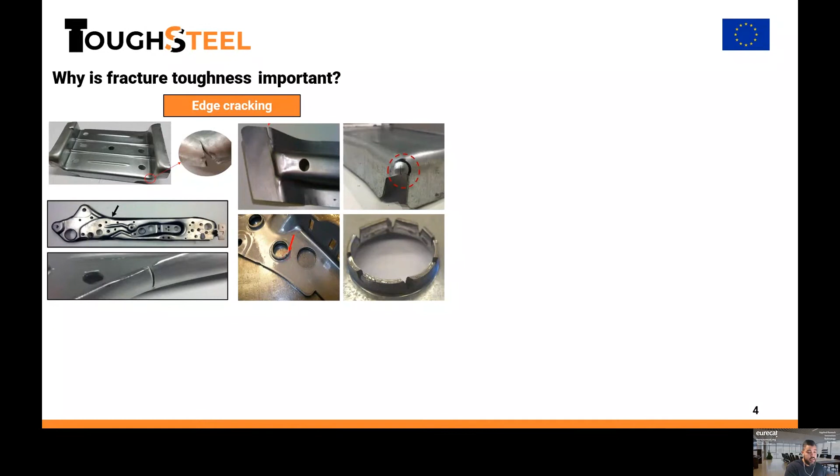With these materials, problems related to cracking resistance and limited ductility are more and more frequent. These include problems like edge cracking during cold forming in damaged, punched, or trimmed edges, or the formation of cracks during impact loading where the material is subjected to severe plastic deformation. These fractures, related to crack initiation and propagation resistance and to the damage tolerance of the material, should be addressed through the material property that governs this behavior, which is the fracture toughness.

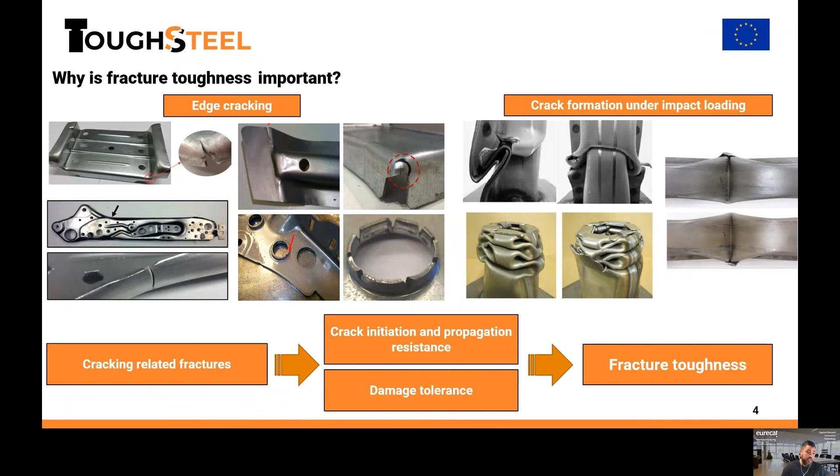We have seen over the years in different research works that fracture toughness is indeed a good, suitable material property to define the fracture behavior of high-strength metal sheets. Now, the key question is how to properly measure fracture toughness.

The first important message we want to make is that fracture toughness cannot be estimated from tensile properties. It is often assumed that steels or materials in general with greater elongation, or greater area under the stress-strain curve, or the greater UTS by total elongation product, which is usually also used as a toughness indicator, are related to the fracture toughness of the material. But this is not true.

We will see this later also. The important message is that we have to forget about this concept, or this approach, of trying to estimate fracture toughness properties from tensile properties.

The correct framework to evaluate fracture toughness, understood as the crack propagation resistance, or the resistance of the material to propagate an existing defect, should be measured in the frame of fracture mechanics. In particular, since we are talking about materials with high ductility or ductile metals, we should consider elastic plastic fracture mechanics.

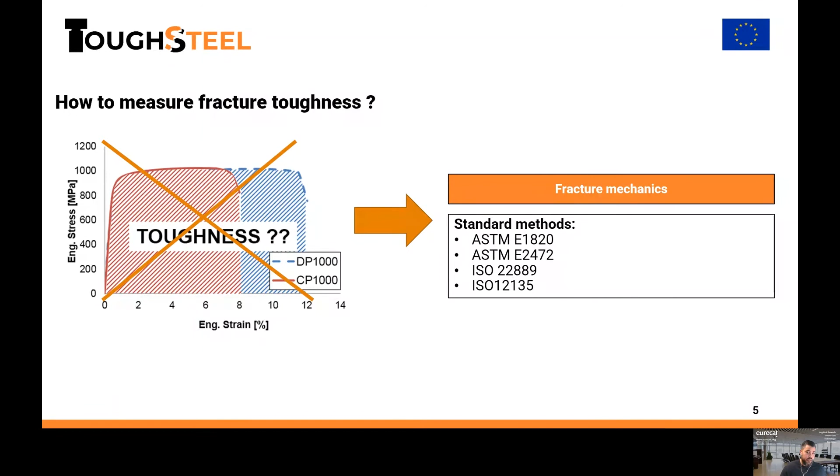There are different standard methods to evaluate fracture toughness in the frame of elastic plastic fracture mechanics. Some of the most popular ones are ASTM E1820, ASTM E2472, or the equivalent ISO standards 22889 or ISO 12135. These standards define different methods and procedures to evaluate fracture toughness in terms of different parameters like the J integral, the crack tip opening displacement, or the crack tip opening angle, and so on.

Now we'll take a look at some of these different methods and what are the advantages and limitations when using these techniques on thin metal sheets.

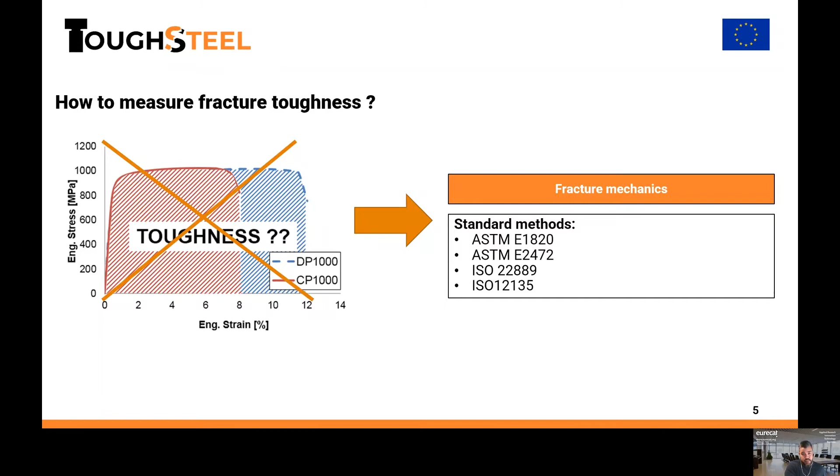First, let's see the J integral. Let's talk a little bit about this J integral procedure. Maybe it's the most known or the most well-established procedure to evaluate the fracture toughness of ductile metals. You can measure the J integral following the procedure described in ASTM E1820.

This standard describes two procedures: one basic procedure to evaluate a single initiation toughness value, J1C, or a resistance curve procedure to evaluate this J resistance curve, like in the image here, where the J values are plotted as a function of crack extension.

These J1C values, or the single initiation toughness value, are known to be very conservative when the material has a significant contribution from stable crack extension. So in this case, the full J resistance curve should be provided.

An important consideration here is that this standard procedure is intended to evaluate the plane strain fracture toughness of metallic sheets. So the thickness requirements described in this standard cannot be satisfied by thin sheets like the ones under consideration, which range from 1 to 3 millimeters in most cases in the automotive sector.

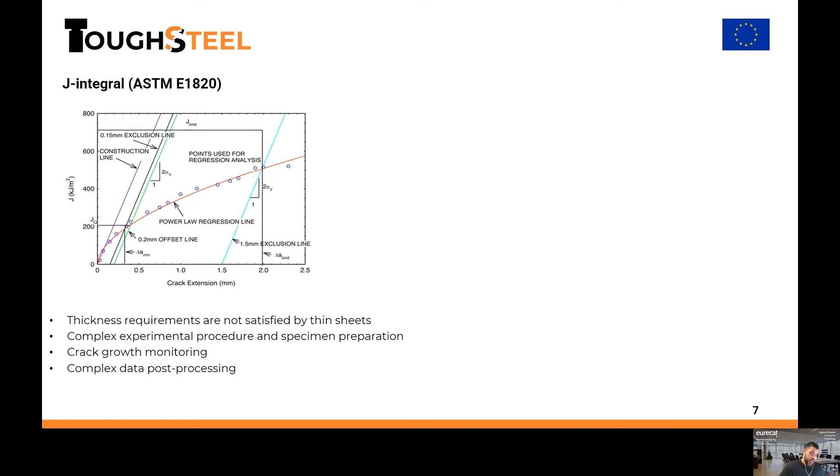Remember that one limitation of these testing methods is the thickness requirement. The specimen geometries described in the standard procedure can't really be applied to thin sheets, because usually the specimen geometries are based on a proportion with respect to thickness—we're talking about 2 to 4 times the thickness. Since we're talking about thicknesses of 1 or 1.5 millimeters, this makes the specimen size impractical for testing.

But if you use alternative specimen geometries, not following these standard recommendations, you can also evaluate these J-resistance curves. For example, you can construct a compact tension specimen with proportions following alternative standards like ASTM E561, which is less restrictive concerning thickness dependence on specimen geometry—it makes no mention of the proportion being based on thickness. So you can use this kind of specimen.

Alternatively, there are double-edge notch tension specimens, which are rectangular specimens with two symmetrical cracks. Using these alternative specimen geometries, you can use similar or equivalent procedures to evaluate J-resistance curves in thin metal sheets.

Here's an example of the J-resistance curve obtained for this kind of specimen. This curve is slightly different from the one described in the ASTM, because here we identify two different parameters: Ji, defined as the J integral at crack initiation—understood as the point where the first small crack advance is detected by a video camera located next to the surface of the specimen—and the JC value.

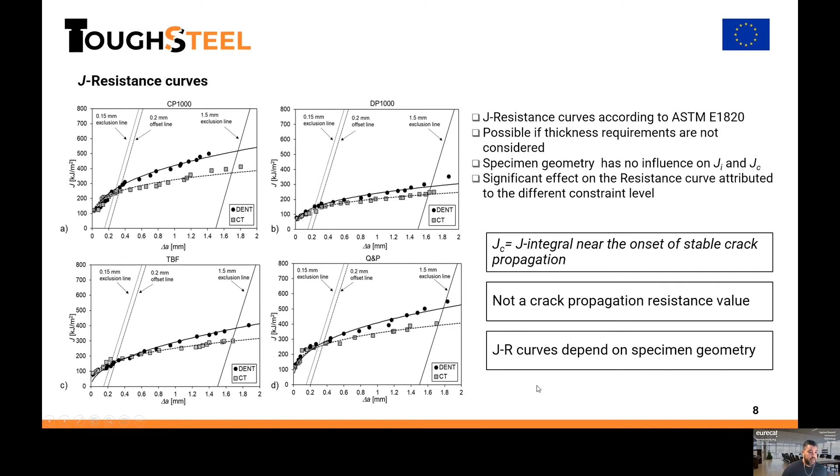Also it's important to keep in mind that these J resistance curves depend on specimen geometry, so this is not a property of the material.

Now let's take a look at another interesting alternative method, which is the essential work of fracture. The essential work of fracture, as I said, is a very interesting method. It was developed by the end of the 70s as an alternative method to evaluate the plane stress fracture toughness of thin metal sheets. And the method is based on a simple idea.

As I said, this fracture energy during a ductile fracture process can be split into two terms: one, the essential work of fracture, which is developed in the fracture process zone, the fracture toughness itself, the energy to generate new surfaces at the crack tip; and also an extrinsic, or non-essential, plastic work. Remember that in the J resistance curve, all the points have an extrinsic contribution from the plastic work. So this is the same idea.

This specific essential work of fracture, which is developed in the fracture process zone, depends on the cross section. It occurs in the crack plane, while this outer plastic work depends on the volume — this plastic work surrounding the fracture process zone depends on the volume.

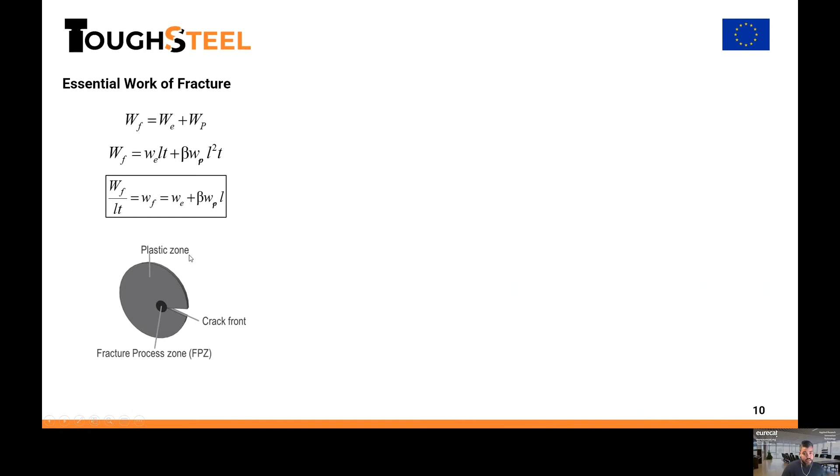This is a simple and very clever way to separate both the essential work of fracture and the plastic work. If we test a series of specimens with similar geometry but different ligament lengths — the ligament length being this uncracked area, or the distance between two notches. In this case, this is a double edge notch tension specimen, which is the recommended specimen for thin metal sheets.

But of course, in principle, any kind of fracture mechanics specimen can be used. In the case of thin sheets, it's recommended to use these DENT specimens because the stress during the full test is tensile and there's no problem of buckling and so on. So this is the most recommended one.

In summary, we test these specimens with different ligament lengths, and by plotting the load versus displacement curve and integrating the area under this curve, we obtain the total work of fracture. As we can see here, as the ligament length increases, the total work of fracture increases — the energy for fracture is larger.

Then, dividing this work of fracture by the cross section, we convert it to a specific work of fracture value, and we plot it as a function of the initial ligament length. We obtain a plot like this, and then we can separate both the essential work of fracture and the plastic work by making a linear regression: the intercept gives the specific essential work of fracture, and the slope indicates the plastic work.

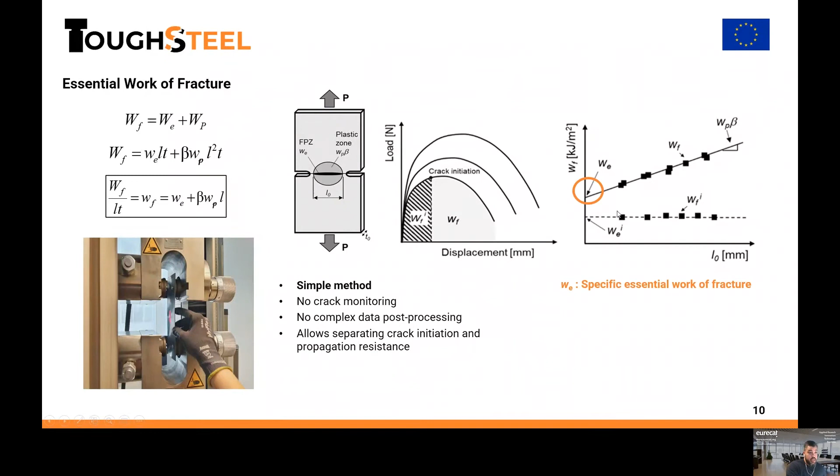The main result, the fracture toughness value we obtain here, is this specific essential work of fracture, which represents an average crack propagation resistance, since it's obtained from a series of energies for complete fracture. So it contains contributions from both crack initiation and propagation resistance. Although in the literature it is often said that this specific essential work of fracture is equivalent to the JC value obtained from the J integral procedure, we'll see later that this is not necessarily true.

Also regarding notation, as you have seen, we use JC to avoid confusion with J1C, which is often used to refer to the plane strain fracture toughness. Since we are in plane stress, we use JC instead of J1C.

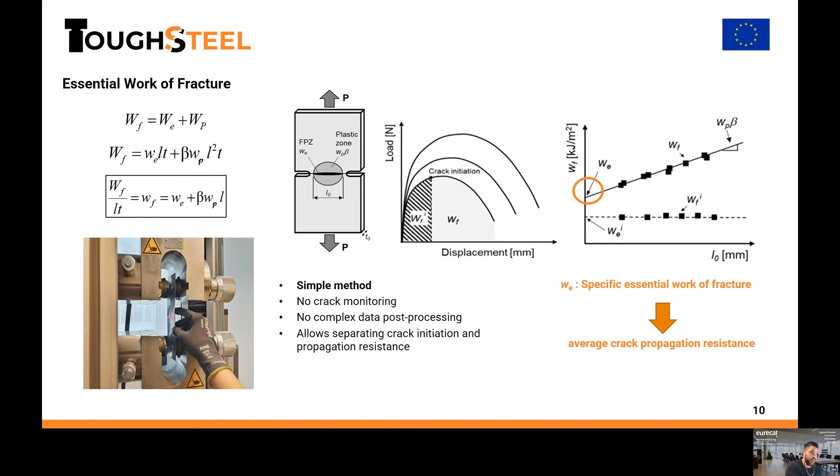There is a testing protocol developed by the European Structural Integrity Society, the ESIS group, but it was actually developed to measure fracture toughness of polymer films, not metals. There are no recommendations regarding specimen preparation and so on for metallic materials. In this sense, we have been working in a recently finished European project called FormPlanet on the development of a CEN workshop agreement, which is like the first step towards standardization of the method, working with relevant companies of the sheet metal industry and standardization institutions like UNE and DIN.

We have developed this method where we describe the methodology, recommendations about specimen geometries, specimen preparation, and so on. We hope this is a first step to standardize the method and foster its implementation in the sheet metal industry.

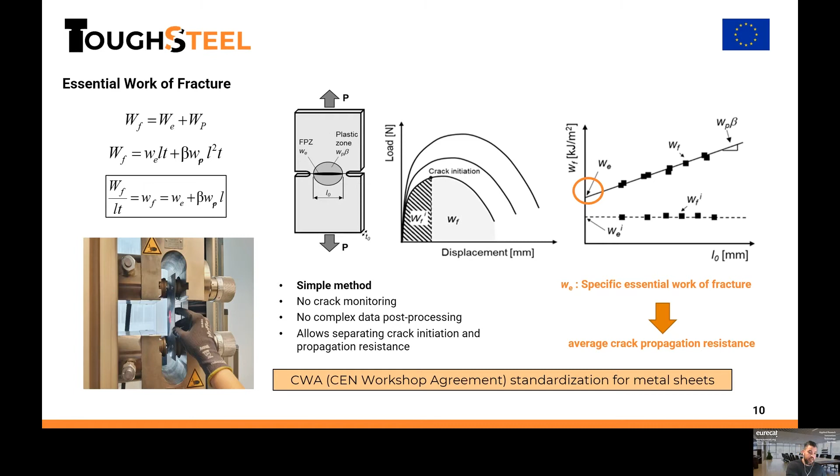As we can see, this is a very useful tool to define the different fracture behavior of different materials, and we have validated this. The method has been used a lot over the years, mostly in polymer films and also in other ductile metal sheets like aluminum alloys and ductile steels, but we have been working a lot with application to advanced high strength steels to understand this different fracture behavior.

As I said, this is an interesting part of the essential work of fracture: it allows separating the contribution of initiation and propagation, with the essential work of fracture related to propagation, but also allowing us to obtain this initiation toughness.

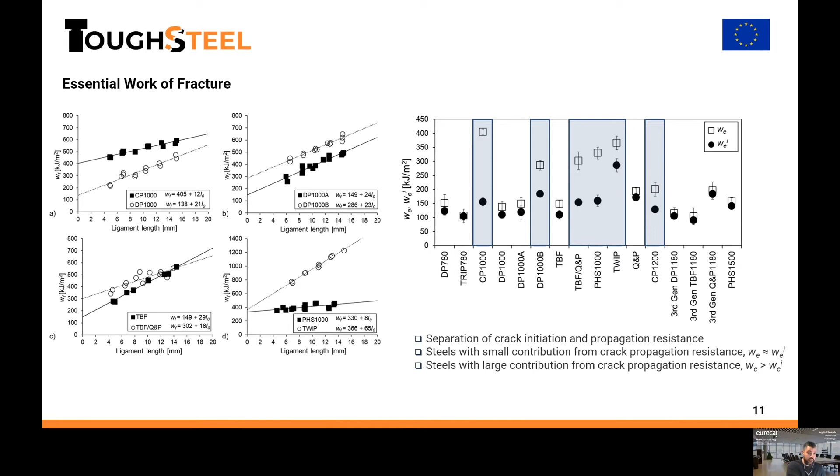Finally, let's talk a little bit about another interesting method that has gained increasing interest over the last years. It has been used especially to characterize the tear testing of aluminum alloys. This is the Kahn-type tear test.

This test was developed to evaluate the notch resistance of aluminum alloys. The procedure is described in ASTM B871, although this standard was withdrawn in 2017. But it could still be applied to evaluate the notch resistance, or relative toughness, of the material. The test consists of pulling this Kahn-type specimen, which is a single edge notch tension specimen. The standard recommends the use of a really sharp notch, and doesn't recommend fatigue cracks, but if you want more accurate values, you can also nucleate the fatigue crack in the notch.

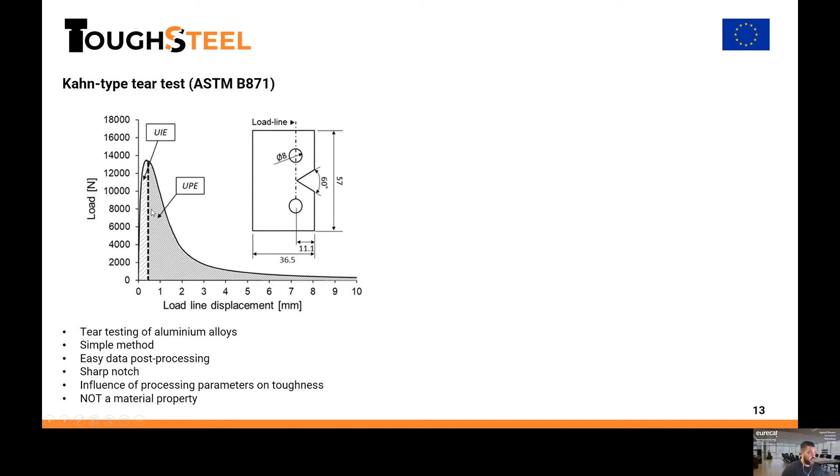Then you pull this test up to fracture, and you obtain this characteristic load versus displacement curve. By integration of the area, you can obtain two parameters: the unit initiation energy, which represents the area up to the peak load and is related to the notch resistance to nucleate a crack; and the unit propagation energy, which is the area under the curve after the peak load until final fracture, representing the crack propagation resistance of the material.

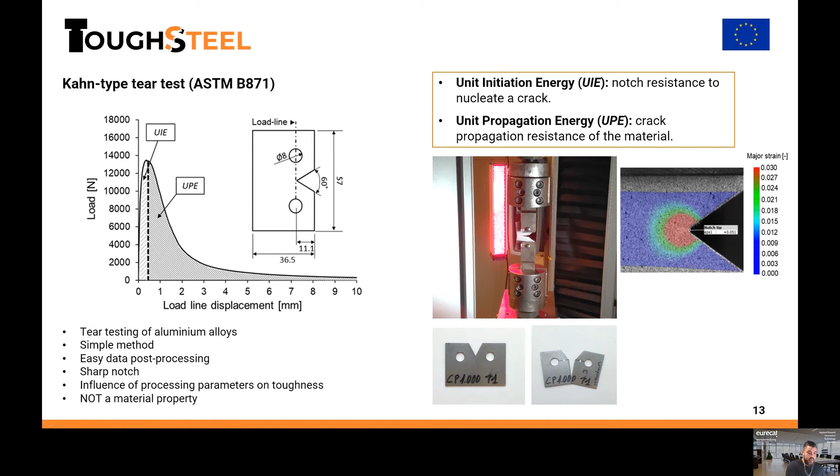This is a very simple method, and it has been very interesting for fast screening of materials. However, it's important to consider that it's not a material property. As the standard suggests, it must not be considered a fracture toughness value itself, but rather a toughness index. The geometry and test setup are quite simple, and it can be combined with digital image correlation to obtain different parameters. However, we must be careful when considering results from different testing methodologies.

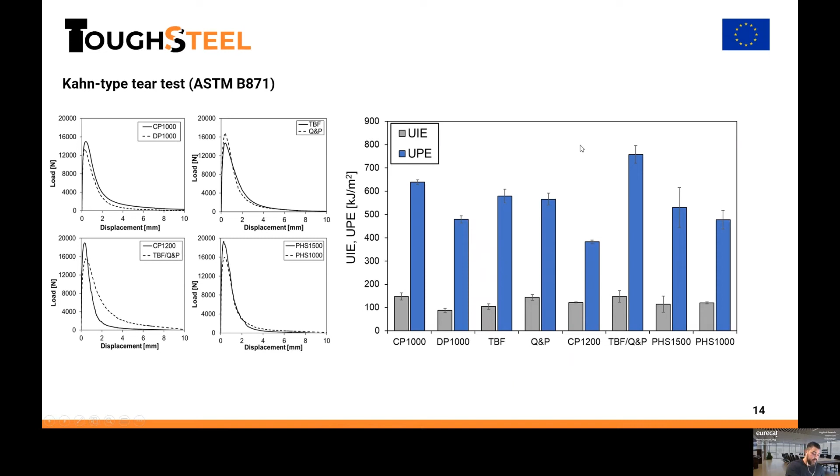Let's see what happens when we compare the different fracture parameters obtained from the different methodologies. This helps us understand the meaning of the different fracture parameters, and which are most appropriate when we want to measure crack initiation, crack propagation, or overall fracture performance. We did this exercise to compare these different fracture toughness parameters.

On the left here, you can see the parameters related to initiation: the JI value described at the beginning, the essential work of fracture for crack initiation, and the unit initiation energy. In general terms, this initiation toughness is quite independent of the geometry and testing methodology, which is good because it's easy to measure.

Then what happens when we look at the crack propagation resistance values, which ultimately define the full fracture behavior of the material? First, looking at the unit propagation energy, the first noticeable thing is that in general this unit propagation energy overestimates a lot the crack propagation resistance compared to the fracture toughness values JC and essential work of fracture.

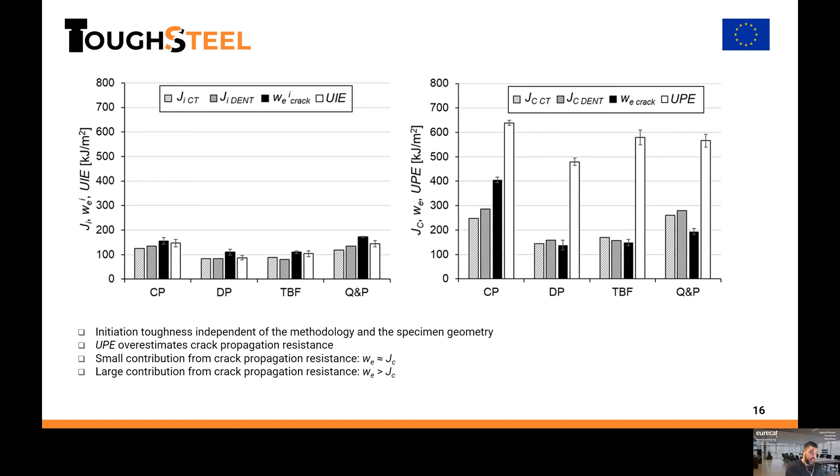In summary, what we have seen when trying to correlate the fracture behavior of these high-strength metal sheets, talking about edge cracking or crack formation in the crash, is that this essential work of fracture is the most suitable parameter to describe all this kind of fracture related to the overall fracture performance or fracture resistance of the material.

Okay, now some, I wanted to illustrate, because I said also at the beginning, that one important message is that fracture toughness cannot be estimated from tensile properties.

So here we wanted to illustrate the correlation on the y-axis between essential work of fracture and different tensile properties: yield strength, tensile strength, or the average of yield and tensile strength as sigma y, strain hardening, or elongation values. As we can see, there is no correlation between this crack propagation resistance and mechanical or conventional tensile properties. So also the idea of the common way of thinking, that higher elongation, higher uniform elongation, total elongation, or higher strain hardening means higher fracture toughness - we can see that this is not true.

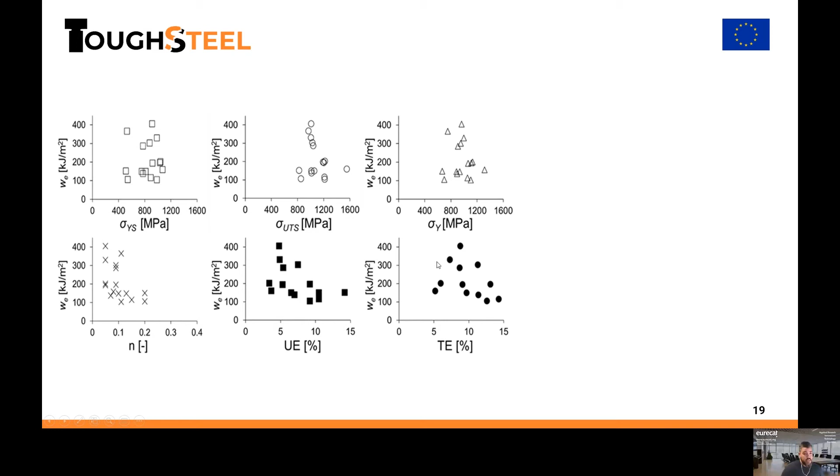Rather, on the contrary, we can see that materials - steels in this case - with higher elongation values often tend to show lower cracking resistance. This is especially critical in advanced high strength steels, because usually in these complex multi-phase microstructures, the deformation mechanisms that contribute to improve global ductility, measured by elongation or tensile properties, can often have a detrimental effect on fracture toughness.

So again, it's important to keep in mind that fracture toughness cannot be estimated from tensile properties. This is also an important message when designing new materials or new microstructures, because as you know, new materials design is mostly focused on optimization of these global properties or tensile properties. But we have also seen that it's important to take into account fracture toughness for this crack propagation resistance.

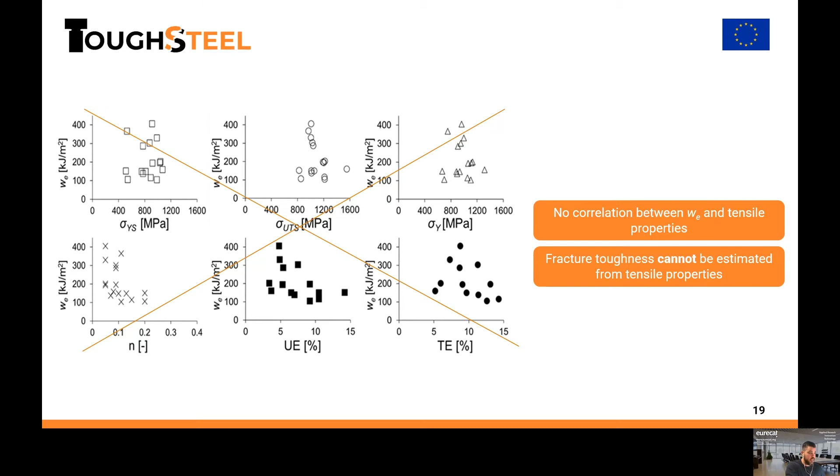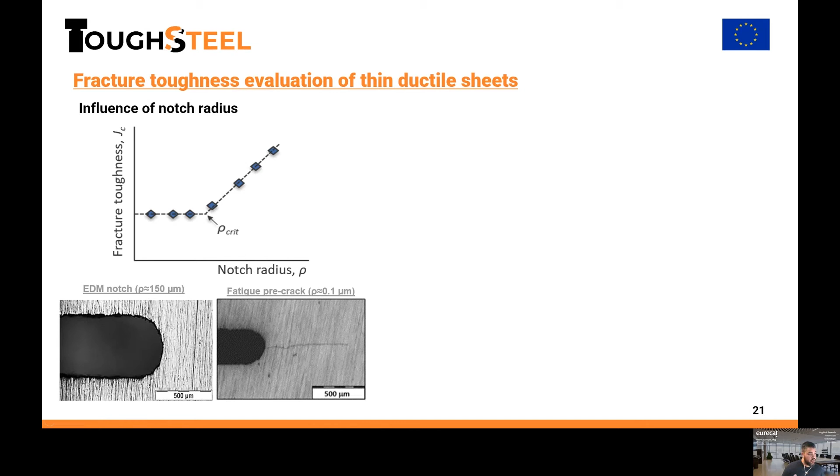Finally, to finish the presentation, an important aspect to keep in mind when measuring fracture toughness is the influence of the notch preparation method, or the influence of the notch radius. As well known in fracture mechanics, fracture toughness - JC, essential work of fracture - depends on the notch radius until a critical notch radius is reached, below which fracture toughness becomes independent of it. But if we want accurate fracture toughness values, we need notches as sharp as possible, with the minimum radius possible.

Here I would also illustrate this influence of the notch radius by comparing essential work of fracture results for specimens with fatigue pre-cracks, shown as black squares, and with machined notches - notches machined by electrical discharge machining with a notch radius of 150 microns. We can see the results for the different steels, and the first thing we notice is that this sensitivity to the notch radius depends on the material - there are materials with low sensitivity to this notch radius.

There are others where the fracture toughness is drastically reduced to half the value obtained from using notches compared to when you use cracks.

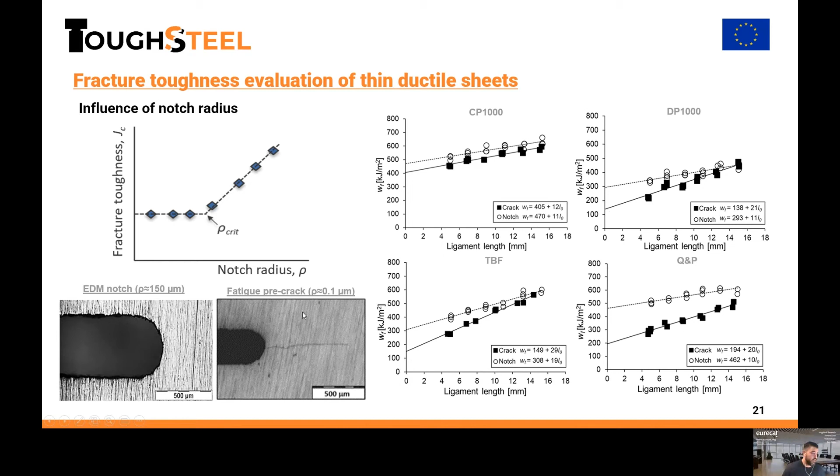This is important to keep in mind if you want to measure accurate values: we need notches as sharp as possible, as close to the fatigue pre-crack as possible.

In this same research line, we developed this testing tool because we know fatigue pre-cracking procedures are expensive and time-consuming and require special equipment, making them difficult to implement at the industrial level.

So we developed this rapid notching procedure to prepare sheet metal specimens with really sharp notches, with a notch radius of about 2 microns, by means of a simple shearing process. We can obtain these sharp notched specimens in a few seconds, and they can be used to evaluate fracture toughness.

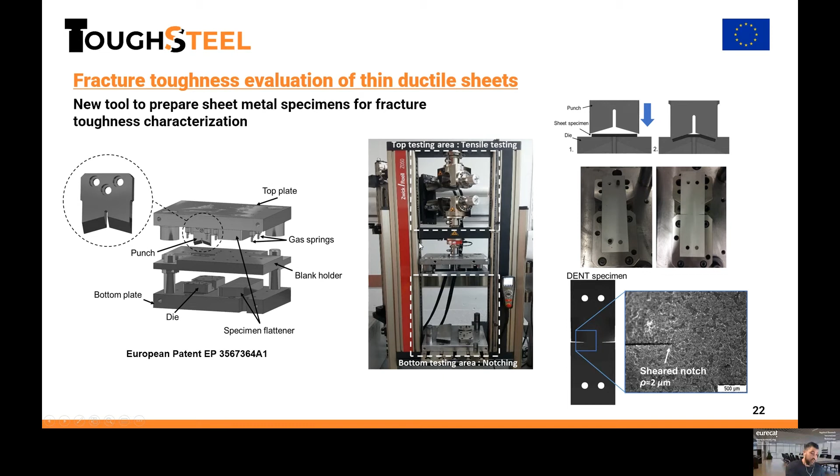We're also still validating the results in different aluminum alloys, stainless steels, and so on. What we found is that this tool is very interesting for obtaining equivalent, or reliable, fracture toughness values in a very short time.

We are talking about a significant reduction. We need around 90 minutes per specimen for fatigue pre-cracking, an average time of 3 working days for testing the material, but with this new procedure we can test it in only a few minutes.

The aim of this tool was to foster the implementation of these techniques at a more industrial level, making this fracture toughness testing procedure easier and more accessible to industry.

And that was my last slide. Thank you very much for your kind attention, and I hope there are questions.

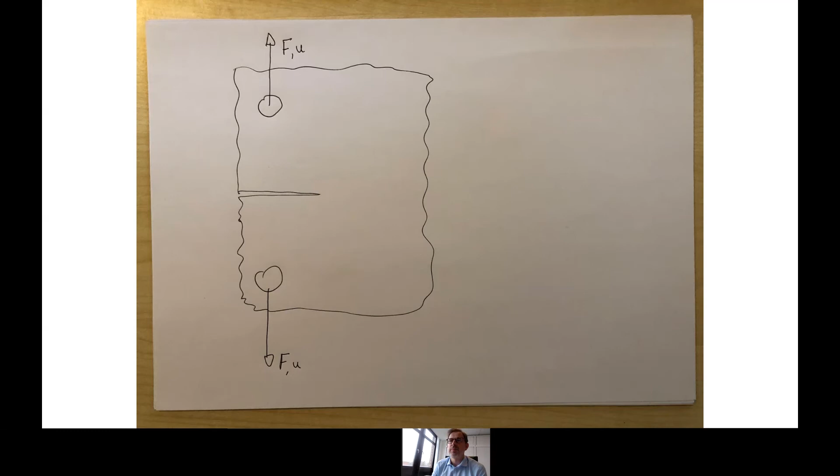So, very basic. You start with a test specimen, and I just want to introduce the concept of fracture process zone. At the tip of the crack, when you load the specimen, you develop a diffuse plastic zone, but you also concentrate the plastic strain and damage in a zone which will ultimately be the zone in which the material will fail.

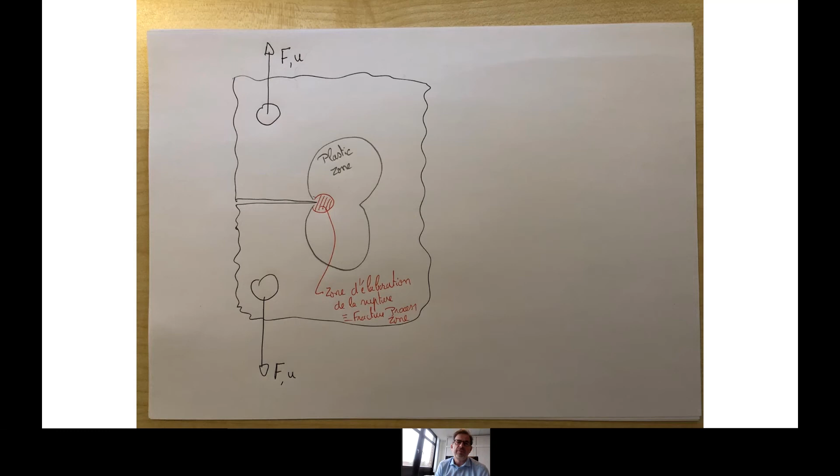This is called the fracture process zone, and the French name is zone d'élaboration de la rupture. There is a well-defined definition for the fracture process zone given by Broberg: it is the volume of material in which at some point the failure process, the plasticity, the damage and failure process will localize. So it's a zone of finite dimension.

The dimension of that zone will scale with a length which I will call x0. That will be the length, and more importantly also the thickness of that zone, which I will call x0 as well. I will assume this zone is more or less equiaxed, which is not completely true, but the fracture process zone is really where the failure process takes place, and this is the zone in which the fracture energy will be dictated. T0 is what I will use as the thickness of the specimen.

The essential work of fracture basically is the work spent per unit area inside the fracture process zone, during propagation, and that was already alluded to by David.

So that's important. Then comes the question: what exactly is the fracture process zone? There is something in terms of physical dimensions, and there is something specific with thin sheets: most of the time we get crack tip necking, and that will dictate the size of the fracture process zone.

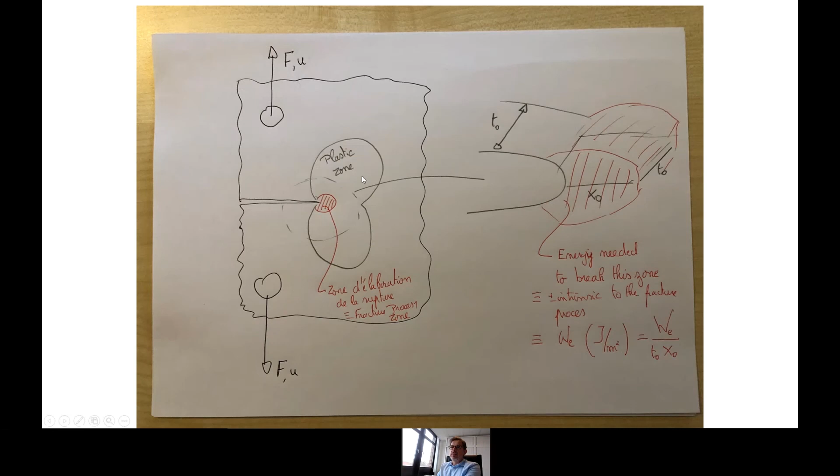So, essential work of fracture - basically the question is how to separate the work spent in the plastic zone from the work spent in the fracture process zone. The beauty of the essential work of fracture approach is based on dimensional reasoning to express the total work, W tot, as the sum of the remote plasticity and the work spent in the fracture process zone while the crack is propagating throughout the entire ligament.

Based on dimensional consideration, fortunately what you find is that the plastic zone work contribution depends on ligament length, while the essential part does not, when you divide the total work by the ligament cross-section area. That's the way you can separate the two terms and get access to the essential work of fracture.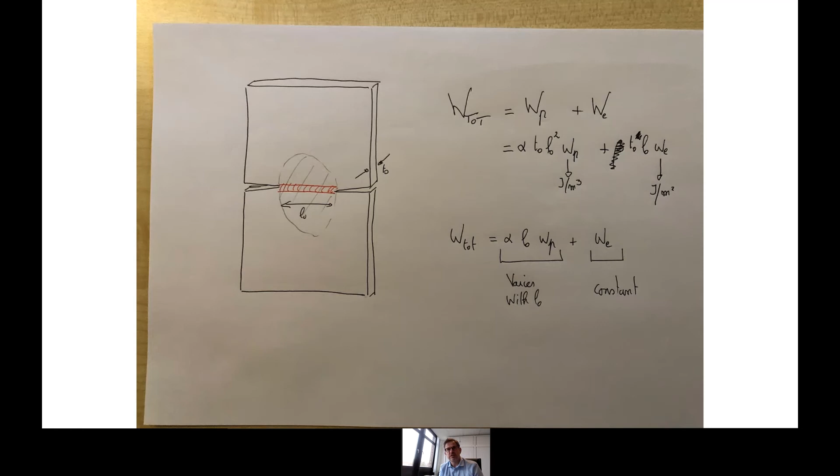There are several rules, and David mentioned some aspects, but Antoine later will give more information about the region of validity, the statistical relevance, etc., of the measurement. So I will not talk about that, but you understood the idea.

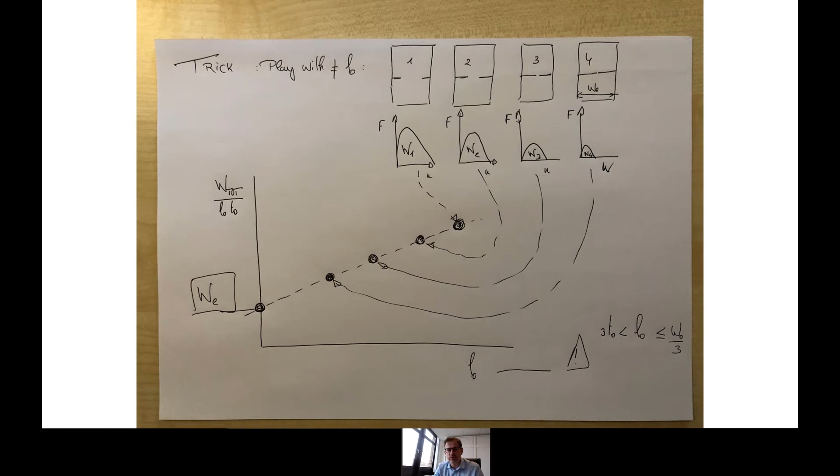You make measurements with different ligament lengths. You measure the total energy, which is very nice because that means you don't need to monitor crack propagation, which is the difficulty in fracture mechanics and JR curve testing. So you don't need to know where the crack is - you just load the specimen till fracture. That allows also working easily on materials at high temperature, for instance. You don't need very sophisticated monitoring of the cracks, nor sophisticated extensometry.

Anyway, that was already covered before. I just rephrase it for some aspects in my own work - the meaning of the essential work of fracture.

First of all, it's extremely important - an error that is often made when explaining the essential work of fracture is to consider it as a regression at zero ligament. Somehow this would be the work per unit area that you would get if you could take a very, very small ligament. That's not correct. It's not an extrapolation at zero ligament. The essential work of fracture is the constant term in a linear regression.

So, through dimensional consideration, you find that the total work is the sum of a constant term and a term that varies with ligament length. It does not say anything like, oh, it's the extrapolated value at zero ligament length. Of course, it is so for mathematical reasons, but don't try to put a physical meaning to that.

As a matter of fact, when you go to ligament lengths that are too short, the stress state moves from the near plane stress regime to plane strain, and what you see is that you're losing the linearity. So this is very important - don't talk about extrapolation or regression at zero ligament length.

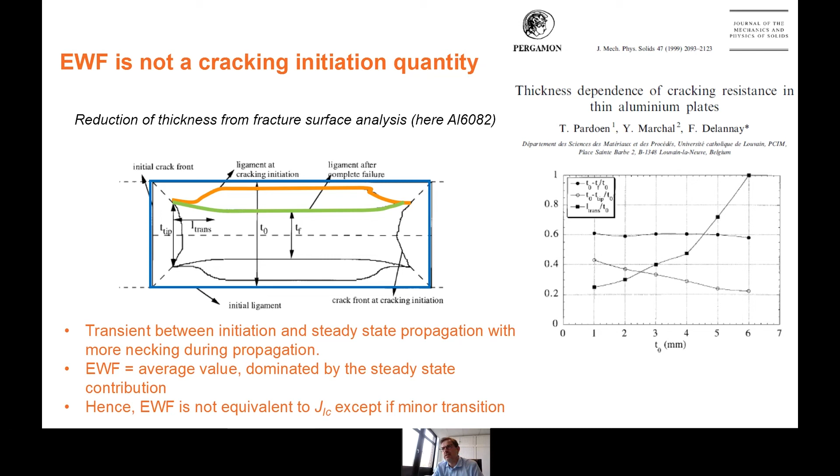I think now it's more or less accepted, but for a long time people claimed that the essential work of fracture was J1C, when it was not. Well, I think this is the explanation, and it complements what David said just before. All right, let's move on. That was about the meaning of the essential work of fracture and also this question of necking and fracture.

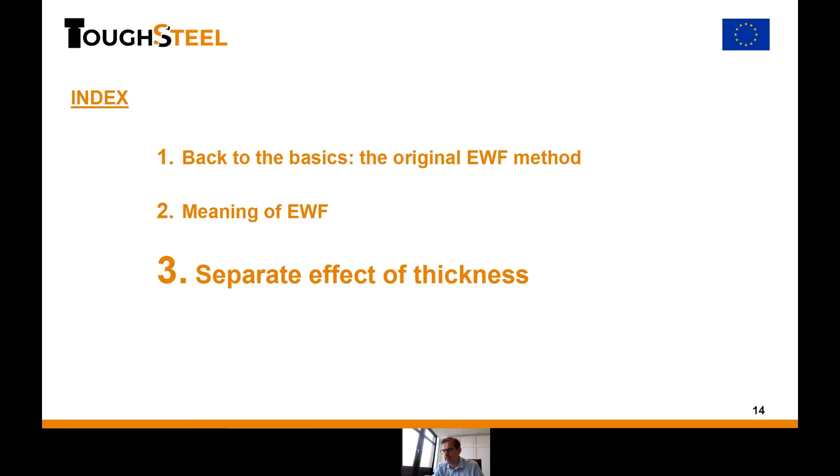Now I want to go deeper into the fact that the essential work of fracture, and as a matter of fact J1C as well, is a combination of two contributions. This is the core for understanding this not so well understood evolution of fracture toughness. Here I call it GC, but it could be essential work of fracture, or JC, J1C.

Why is that? Understanding why the fracture toughness increases when decreasing thickness is easy: you're slowly entering the plane stress regime. The stress triaxiality at the crack tip becomes lower and lower, so the local fracture strain at the crack tip can be bigger and bigger because the damage mechanisms are slowed down. But why do you get a decrease, often with a linear shape, at very small thickness? This has to do with the work of necking, and I will explain that in a second.

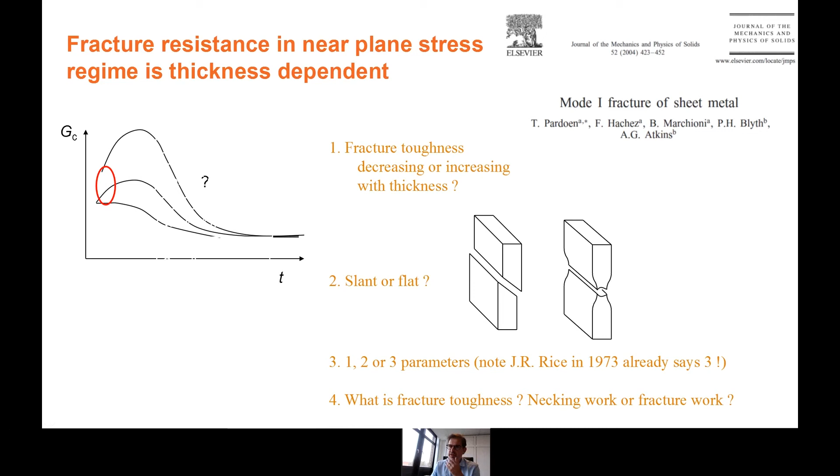He wrote a very good book on fracture of materials with very creative fracture methods. So let me go back now to this aluminium 6082. And we got exactly similar results for stainless steels, for different kinds of steels. I will show you more results later.

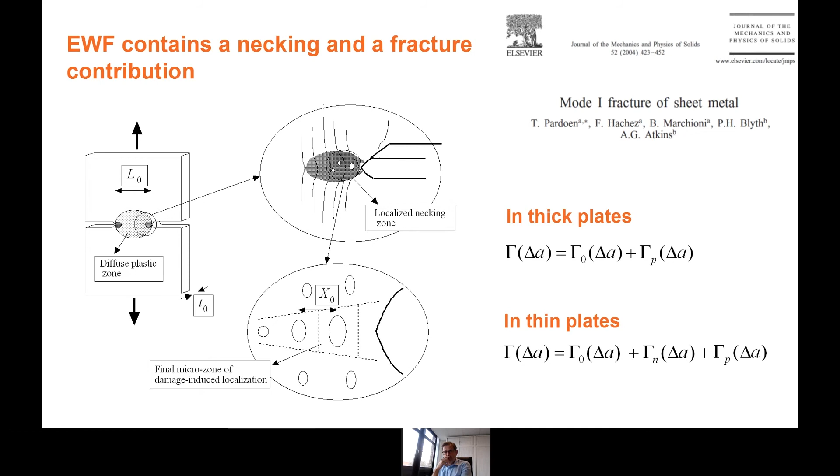Okay, let's go back to the point I made earlier. There is a contribution from necking and there is a contribution from failure. Can we go deeper into that? And from a better understanding, can we rationalize this effect of thickness?

So now I'm going back to this relatively old paper in which we try to separate these two contributions. Exactly as what we do for the essential work of fracture, where we try to separate the extrinsic plasticity and the work in the fracture process zone, now we take the work in the fracture process zone and try to separate the necking work and a more essential, a super essential work, which we call gamma 0.

And in order to do that, we develop a double regression approach, where basically you do tests at different ligament lengths and then tests at different thicknesses, in order to separate gamma 0 from the work of necking.

As a matter of fact, what you find is that the total work of necking is proportional to thickness. And why is that? The work of necking scales with the volume of the neck, and the volume of the neck increases with the thickness. So it's proportional, it depends on thickness. And if you take the work of necking per unit area, what you find is that it scales with respect to the thickness.

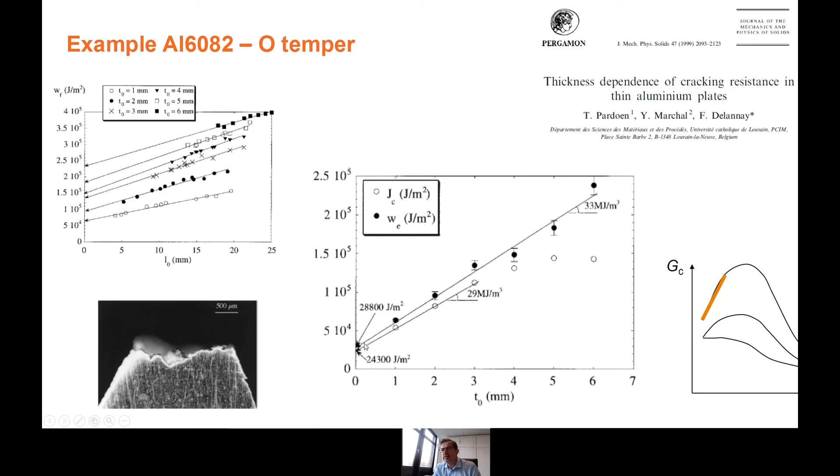So look back at the result I've already shown before. You see that the essential work of fracture increases linearly with thickness, and there is a constant term—this term is gamma 0—and the extra term here is the work of necking.

Can we go deeper and try to put numbers on the work of necking and relate it to other quantities? So we tested at that time many materials, and as a matter of fact these materials were coming from Tony Atkins, and he wanted to look at these materials from an archaeometallurgy viewpoint. So we worked with all these materials at different thicknesses—I will not go into details.

Why is it stuck? Okay, let's look at the fracture surface of all these materials.

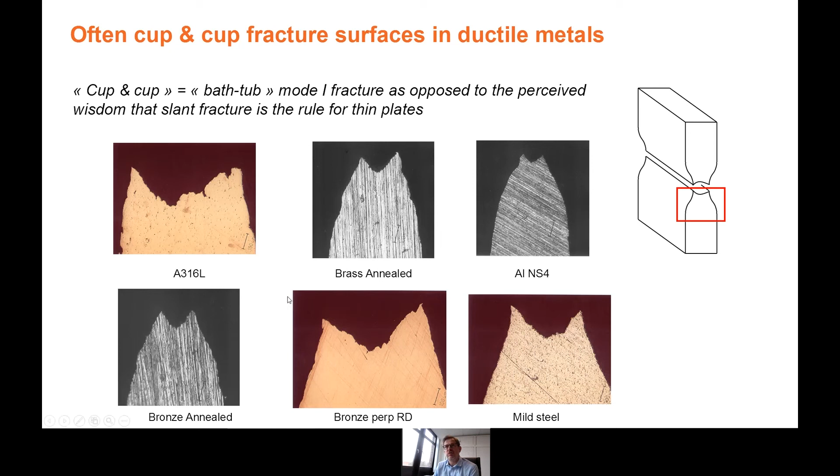We measured using this double separation of energy contribution. We estimated experimentally the gamma 0 for all these materials and the work of necking per unit volume or per unit area. So here, what you see is the ratio between the damage and fracture contribution divided by the necking contribution, both expressed in work per unit area. And we have to take a specific thickness, because for each thickness you get a different work of necking, so we took 1 millimeter, a typical sheet.

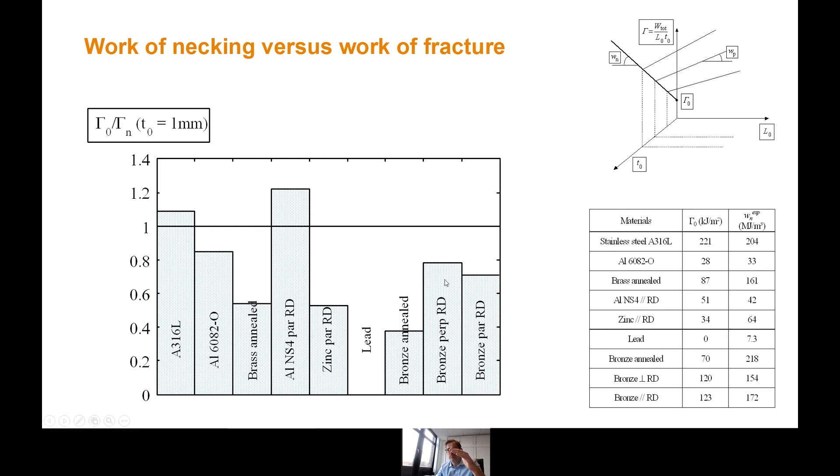What you find for different materials is that sometimes the gamma 0 dominates—this is an example for this aluminum alloy. But for other materials, you see that the work of necking dominates. The more you increase the thickness, the more the work of necking will dominate, because the gamma 0 will remain the same, but the work of necking will increase proportional to thickness. So you can have different scenarios, and the values are given on the right.

Perhaps I will go fast here just to show you—if you are interested, please go to the paper, don't hesitate to contact me if you have questions. But we developed a model for the work of necking, and we developed a model for the work of damage.

I will not go into any details, just telling you that the work of necking can be calculated by integrating the plastic work that is dissipated in the neck as the neck progresses. You have to integrate the work from the minimum at the center to the upper part of the neck, integrating the plastic work to get an estimate of the work of necking, total work or work of necking per unit volume. In order to do that, you assume plane strain condition in the direction of the ligament, which is known to be a very good assumption if you run 3D finite element simulations.

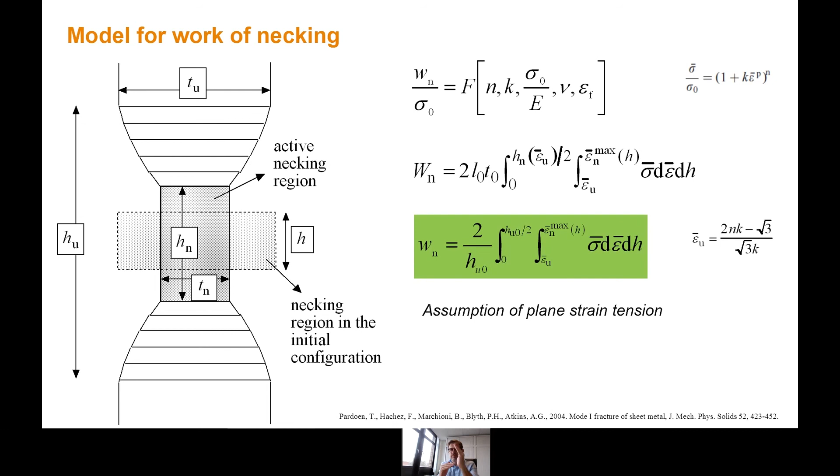There is one parameter you need to know: the expansion of the neck in the length direction, or elevation direction. So the neck is not necessarily a one-to-one shape, but it may be longer. Indeed, if you run finite element simulation and look at the profile of the length of the neck, you find that the height of the neck and the thickness of the neck don't give you a value of 1, which you would get for a perfect plasticity material, but you get a value that is larger than 1, and which will be larger as you increase the strain hardening exponent. Larger is your strain hardening exponent, wider is your neck—it redistributes plastic strain, or tends to delocalize the necking.

That's important, because higher your strain hardening exponent, larger the neck, and so more dissipation you can have in your necking zone. We quantified this alpha parameter by running a lot of finite element simulations, and we got an empirical equation for that.

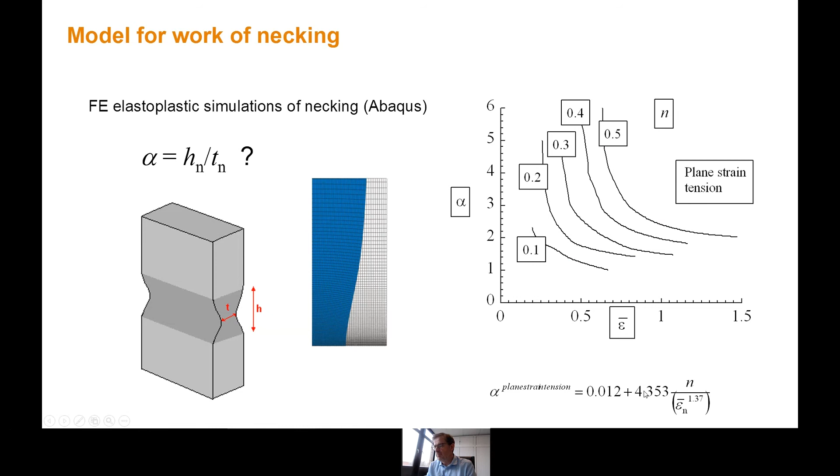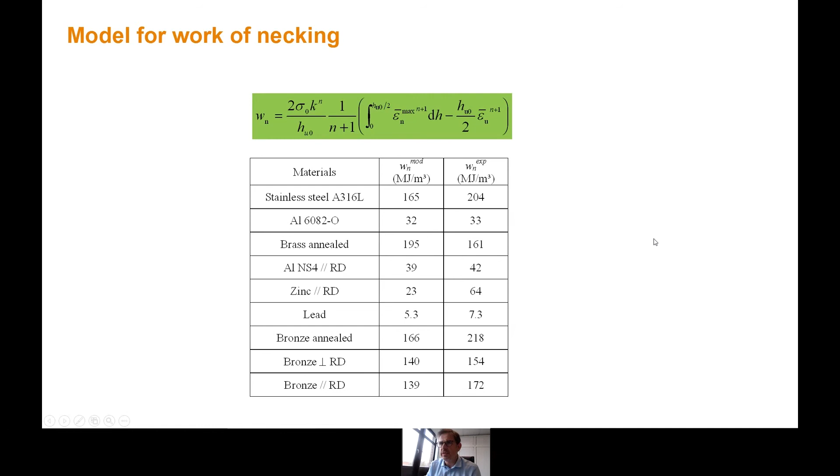We estimated the value of the work of necking from this model, and we compared the prediction with the experimental value. Of course, there is one parameter you're not predicting but measuring—the fracture strain. So one of the parameters that enters the calculation of the work of necking is the fracture strain, meaning the strain at which you stop dissipating by necking, because basically it's broken. But you see the values here, it's not right on top—of course it's not right on top, and even for some materials not very good. But semi-qualitatively, it's okay. It shows that we can understand what are the key ingredients of this work of necking. In the paper, you will find curves giving you, for instance, the work of necking per unit volume in a thin sheet for a crack that propagates, normalized by yield stress, normalized by this hardening parameter and strain hardening data.

Okay, that was for the work of necking. And once again, the work of necking per unit area evolves proportional with thickness.

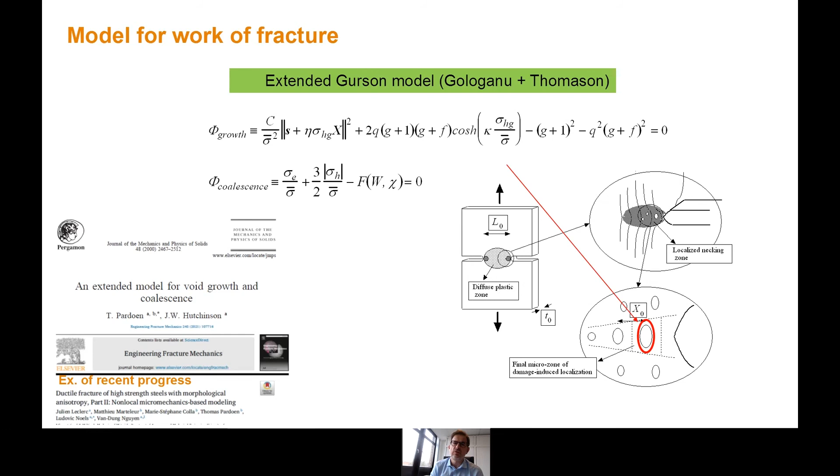For the gamma zero term, this part is more complicated because we need a damage model to calculate the work spent to nucleate, grow, and coalescence voids in a zone which is undergoing a stress state representative of the stress state at the tip of a crack in a thin sheet. Every word I said is important.

So what I did at that time, I was working on damage. This is my old subject. This is the subject of my heart.

And I was using this complicated Gurson model with another coalescence model, etc., whatever the details, to estimate the work per unit area needed to break a material element that would be located in the middle of the neck at the tip of the crack in the thin panel. So I was applying a stress triaxiality corresponding exactly to the loading condition of a material point there, to estimate the evolution of stress with displacement and calculate the gamma zero.

And you see the equation, the symbolic equation on top: gamma zero, this energy per unit area to grow voids until failure, normalized by the distance between voids and normalized by flow stress, is a function of different parameters. F0 is the initial porosity, and W0 is the initial shape of the void.

And so we calculated this parameter for different strain hardening exponents, etc. We also compared the gamma zero to a J1C value that would be obtained in pure plane strain. And typically, if you trust the model - and there are many, many assumptions, so we have to be careful - the ratio of the two would be a factor of 3. So the gamma zero, if everything is correct here, would be 3 times the J1C.

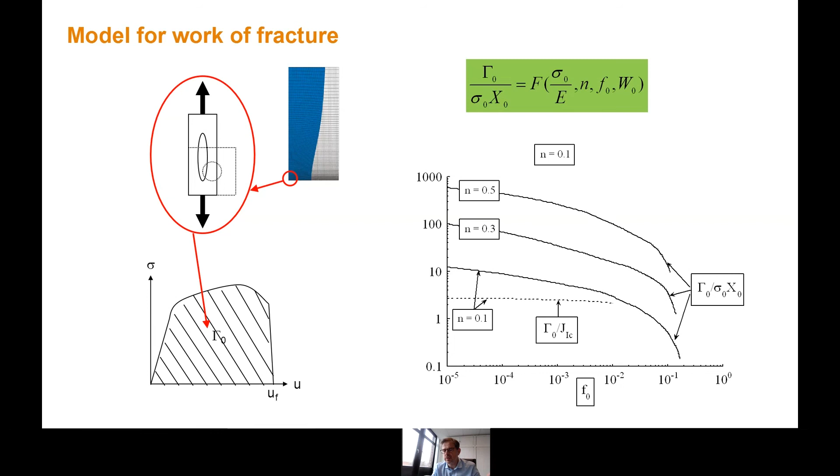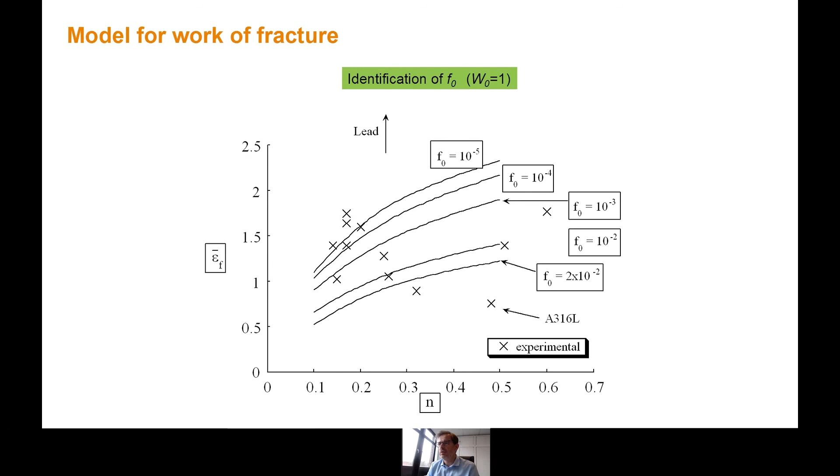And on top of gamma zero, you also have work of necking. In order to calibrate the model, I had to see if we could get good prediction of the fracture strain, so to fine tune the F0 - I will skip these details. We also measured on the fracture surface what should be the void spacing by measuring distances between voids, so I will skip that too.

And so that explains why people sometimes find that the fracture toughness first increases a lot with thickness, reaches a maximum, then decreases to an even lower value. But sometimes you may be in regimes where the work of necking is insignificant, and then you can have your fracture toughness decreasing down to plane strain. And this is still open for discussion, for sure.

And so I hope that by giving you this extra information, that helps in understanding better what is behind the essential work of fracture.

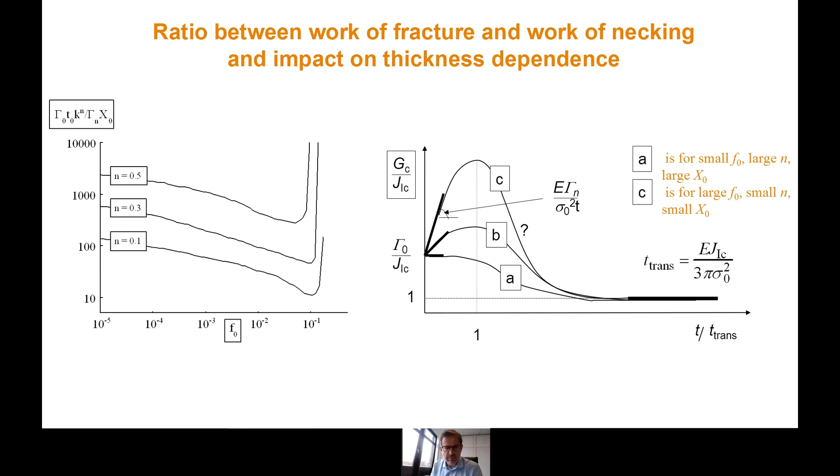A final point, just to show you that we have not stopped working on that: for instance, Karim Ismail did a PhD together with Pascal and with me on advanced dual phase steels, comparing equiaxed microstructure and fibrous microstructure. And Karim did this painful set of tests to measure essential work of fracture at different thicknesses to separate the gamma zero and the work of necking.

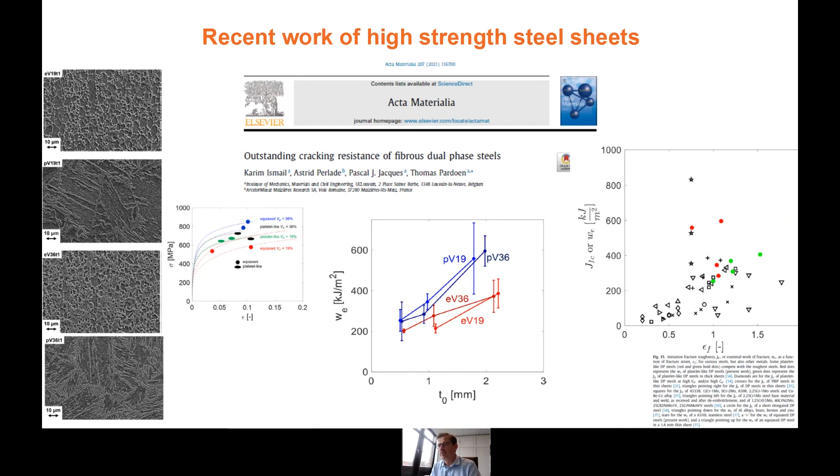And the goal was to understand why this fibrous dual phase steel was much better than the equiaxed dual phase steel. We wanted to know if it was coming from the necking or from the gamma zero, because that indicates where you have to go to improve even more your microstructure. Based on that, these are the conclusions, and I will not repeat them: work of necking, work of fracture, essential work of fracture is a propagation quantity. Thank you for your attention.

Thank you, Thomas, for this clear and detailed analysis of the work of fracture. As always, once you start to go into the details, it can become quite complex, but you still show that there are some challenges and still things to understand.

So we're not getting younger, Pascal, with this. No, no. Okay, thank you.

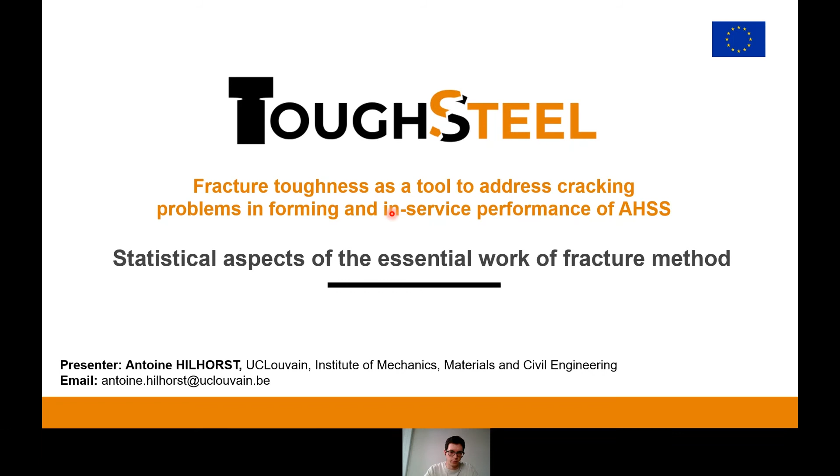Thank you for introducing me, Pascal. I will build upon what David and Thomas said, because I will talk about the statistical aspects of the essential work of fracture method. During the 4 years of my thesis, I worked a lot with this method, and I had to make some improvements. So I'll talk about this.

I constructed this in 4 parts: I will give a brief context and motivation, then show two ways I improved the essential work of fracture method, and finally give some guidelines I use to analyze my experimental essential work of fracture data that could be interesting for you.

So let's start with the context and motivation. I work with a lot of ductile materials, and I'm interested in measuring the fracture resistance of these alloys. As you saw, the essential work of fracture method is one of the best, if not the best, method at the moment to characterize this.

This method has several advantages. You only need the load and displacement curves of your tensile tests, which means you do not need to record the crack propagation, etc. So it's a very nice advantage.

The second advantage is easy specimen preparation, because you do not need fatigue pre-cracking. But like David said, it's not as easy as that—you need the notch radius to be small enough, which is material dependent. Luckily for me, for all my materials, I did not need to do any fatigue pre-cracking.

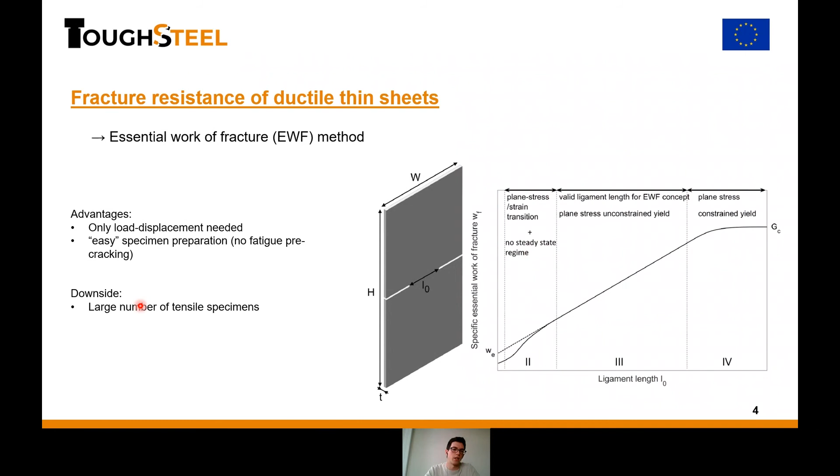That means you need a large number of tensile specimens. This is typically fine in industrial settings where you have a large quantity of material, but it can become problematic when working with expensive or hard-to-process material, or if your specimen size is limited by the initial sheet dimensions.

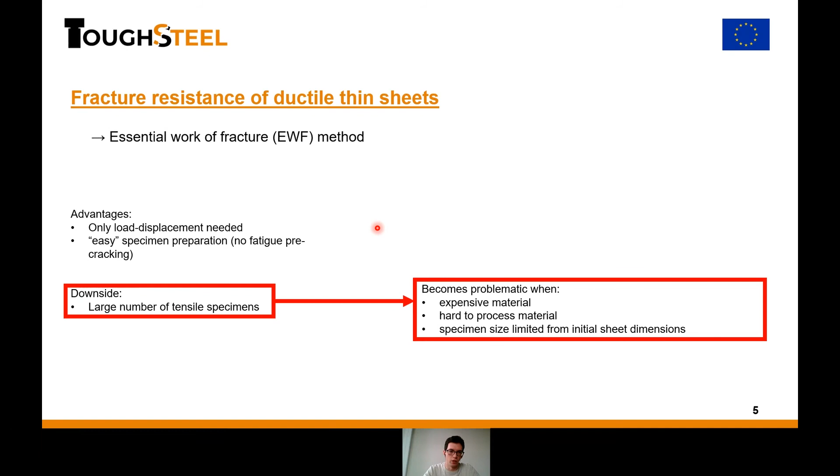In my case, I worked with material processed in the lab, so I was limited both in size and in the total quantity of material I had to work with. It was mandatory for me to find a way to reduce the total amount of material needed to perform the overall analysis.

So I will show you how I improved the method with the goal of reducing the total amount of material while keeping the same statistical error on the extracted essential work of fracture. I did it in two ways.

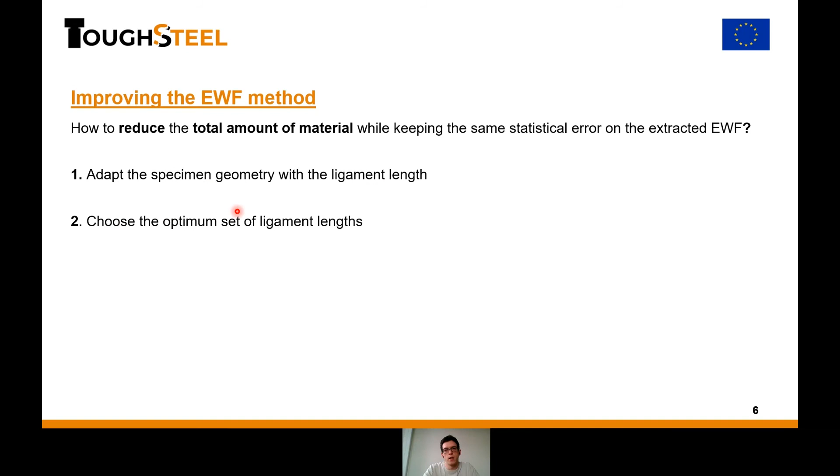The simplest way is to adapt the specimen geometry to the ligament length, and the second one is to choose an optimum set of ligament lengths. So let's go over the first one.

So Thomas briefly talked about this, but for the measurement to be valid, you need two requirements. The first one is that the ligament should be entirely plastic before the crack initiation, and the plastic zone must be confined to this ligament.

So basically that means we are in this case here, because if your ligament, your notches, are too far apart, the plastic diffuse zone will not interact between each other, and so you don't have this relationship where all your samples are geometrically similar, and so you cannot have your total work divided into the two contributions.

And in the other way, if the ligament length is too small, you start to have your fracture process zones interact between each other, and the stress state will not be similar between each sample again, so the method is not valid either.

So what you find in the literature is some bounds on your ligament length. Typically the lower bound is between 3 to 5 times the thickness, and the upper bound is either linked to the width of your dent—typically a third of the width, or half of the width—or the size of the plastic zone, computed with the Irwin formula, but you also need to know some material parameters. One thing to note is that these two are empirical values and they are not very well defined, so the bounds are a bit fuzzy depending on which material you use.

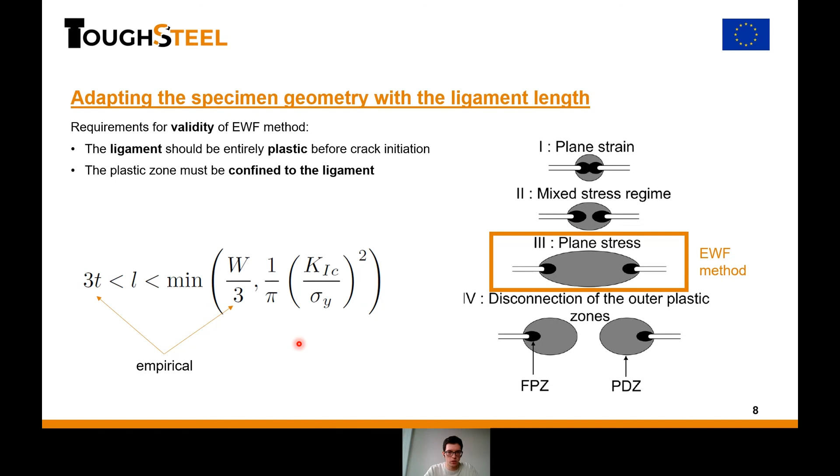The second set is a series of tests with adapted sizes, where the width is twice the ligament length and the height is twice the width. I also did a few more tests where I kept the height the same, at 100 millimeters, but varied the width between 20 to 50 millimeters, while keeping the ligament length about constant—though since I need to prepare the samples, there was a bit of variance between the ligament lengths.

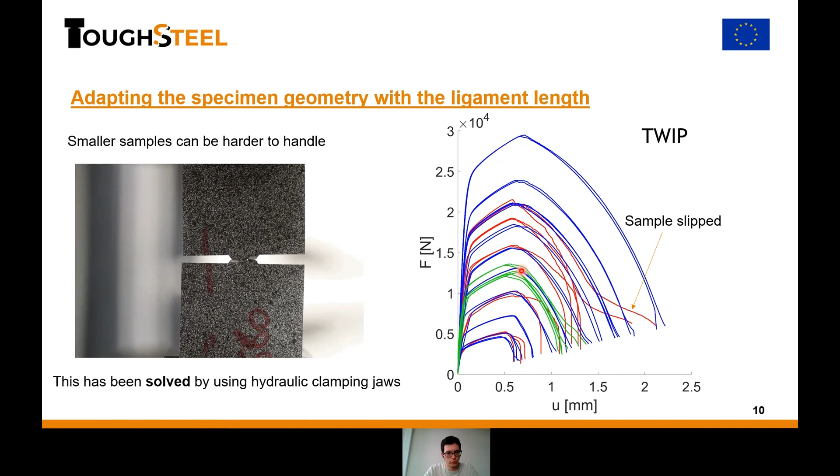We now use hydraulic clamping jaws, which work a lot better. But still, the takeaway message of this first part is that yes, it's possible to reduce the total amount of material needed just by adapting the specimen geometry.

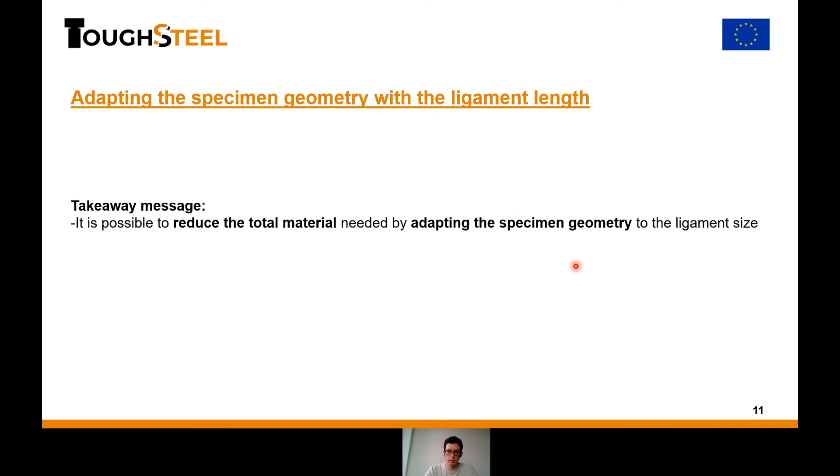So the second point is now, can we choose an optimum set of ligament lengths? So typically what you see, and what David showed, for instance, is that between the two bounds of the ligament length, we choose a number of samples to test, and then we space them equidistant manner between the two bounds. So for instance, if we have 15 tests, we would try 3 tests at 5 millimeters, then 3 at 10, 3 at 15, 3 at 20, and 3 at 25. And we are happy with this.

But a question that we can ask ourselves is, is there a better way to place those samples? So for instance, maybe it's better to have more samples closer to the lower bound and a bit less samples at the upper bound, or maybe it's something different where you have half at the lower bound and half at the upper bound, but 1 or 2 samples in the middle.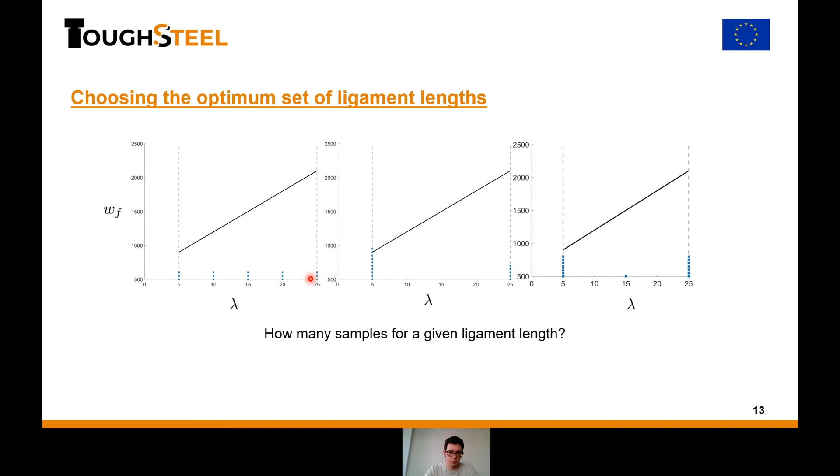And moreover, now that we have our sample size dependent on the ligament length, if we have more samples with a small ligament length, this means we would reduce even more the total amount of material needed. But of course, we want to keep the error on the expected essential work of fracture the same or better than the equidistant case. So we need to define how we do things to be able to have a solution.

So for this, we need to go back a bit to how we do the linear regression. So we assume that we have a set of data points, and we assume that it is linearly distributed. And so we have our two parameters here for the distribution, and some white noise that explains the variance in the data sets.

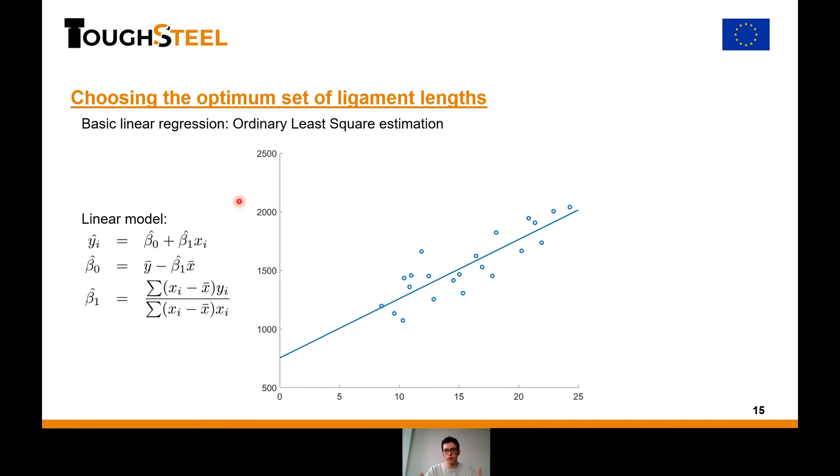And so the OLS estimation, so ordinary least square estimation, is the most basic way to do linear regression. It is basically to minimize the square of the distance between the straight line and your data points. And this translates to this formula. So this is a very classic way to do linear regression.

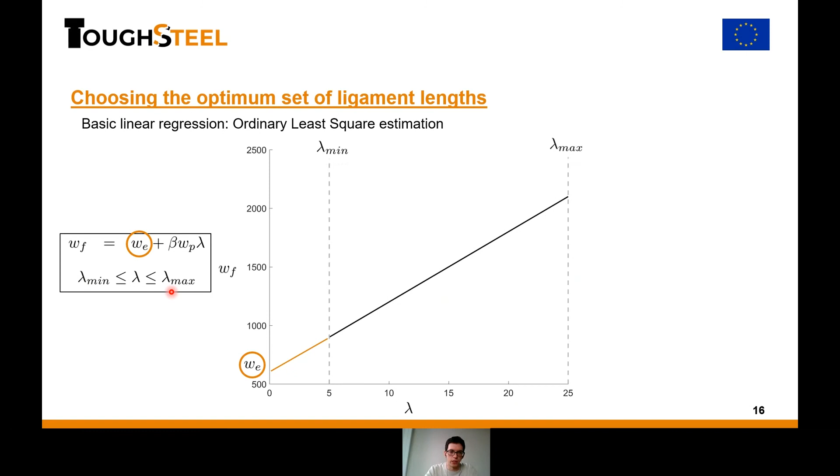And in the case of the essential work of fracture, it's exactly this. So we have your total work, that is the sum of two contributions: one constant term, that is the essential work of fracture, and a term that is dependent on the ligament length, times a parameter, the non-essential work of fracture, and a shape factor beta. But the important thing is that the ligament length is bounded by two values. So here I call them lambda min and lambda max.

So here is how I set the optimization problem. I have an objective function where I want to minimize the total amount of material. A DENT sample is basically the width times the height. Since my width and my height depend on the ligament length, the objective function for the minimization of the total amount of material is simply lambda squared times a proportion, because for each ligament length I can have more or less specimens.

So my conditions are that the sum of this proportion should be equal to 1. And I impose two things: I want the error, represented by the variance on the estimator, to be lower than the equidistant case, and this for both the intercept and the slope.

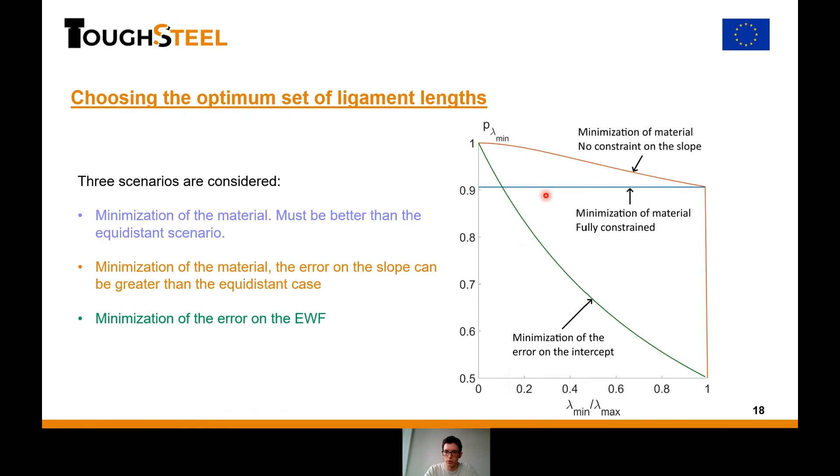What does it translate to in the fraction of material that is saved? So I compare the blue and the green scenarios to the equidistant case, so the fully constrained, we see. I'll take again the case that is close to what I work with, which is around 0.2. So when you compare the fully constrained solution against the equidistant case, we see that we save about 70% material. And for just the minimization of the essential work of fracture, we save about 50% of the material.

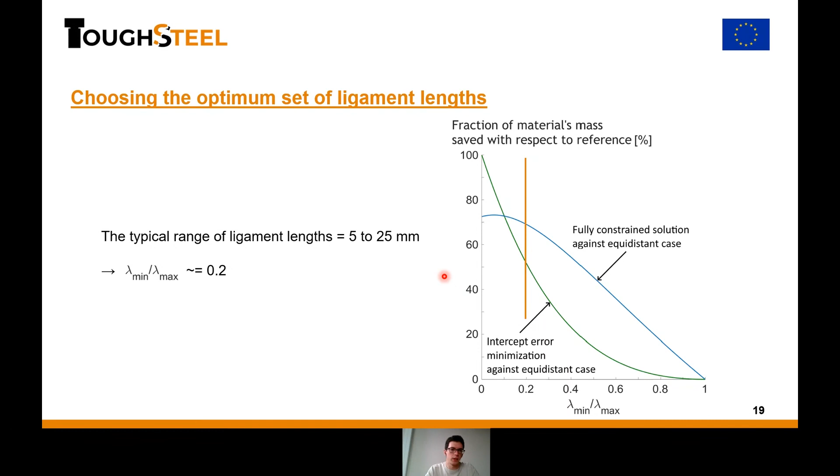So, but this is a bit of a statistical and mathematical model. How do I validate this model?

So first, I try to validate it numerically, doing a type of Monte Carlo simulation where I set the true behavior, which would be linear. So I would know these two parameters, beta 0 and beta 1. Then from this, I would generate a random dataset with different strategies, either with more samples with lower ligament lengths and less samples with larger ligament lengths, and then make a linear regression from this randomly generated set. This would be in blue, and then I would compare the estimator to the true value.

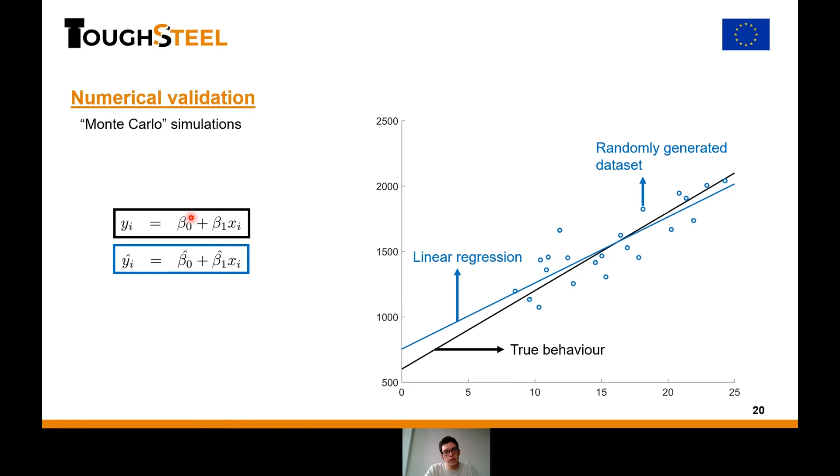And so I summarize this in this graph. I have 4 different scenarios. I'll go through first what is displayed on these figures. Basically, it's the estimator minus the true value, normalized by the true value. So the larger the spread around each axis, the larger the error or potential error you make using this type of scenario. On the x-axis is the intercept, which would correspond to the essential work of fracture, and on the y-axis is the slope of the regression.

So we see in yellow the equidistant case, where the spread on the slope is quite tight, so this is quite nice, but on the intercept it's quite large. And in red and in blue are the two distributions I developed with the statistical model. We see that the spread is a bit similar for the slope, but it's a lot tighter for the intercept. So this is what we wanted. In the case of the values I took for this simulation, there's not a lot of difference between the two models here.

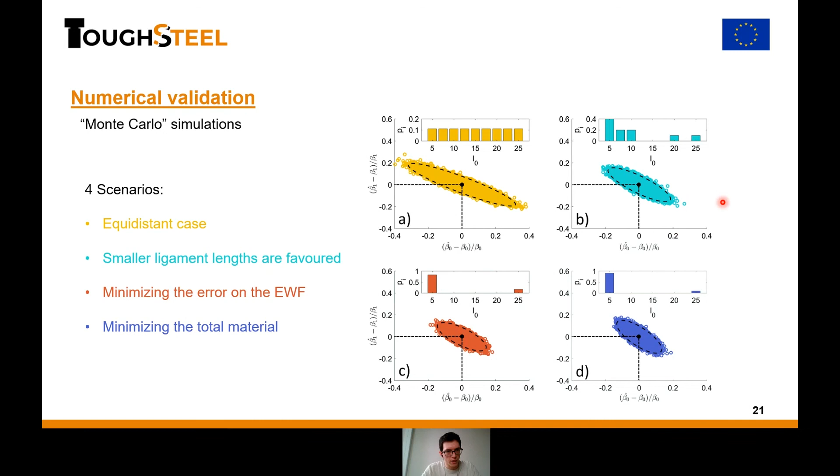So the takeaway for this part is that, yes, it's possible to reduce the total material needed by carefully choosing the ligament length. But the second thing that is shown is that even if you don't adapt the specimen size to the ligament length, you can still improve your error on the essential work of fracture by choosing carefully the ligament length.

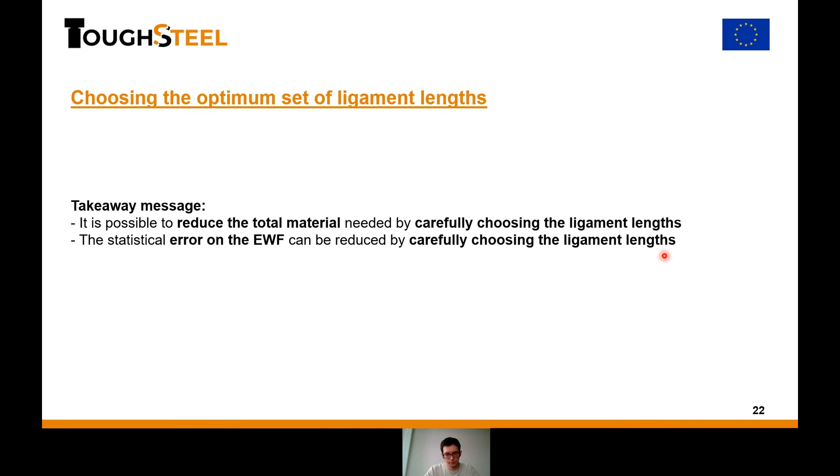One of the big things to analyze your data is to identify where the outliers are. So the first thing you can do is something I already showed you, which is to draw the confidence intervals, and points that fall outside them can be identified as outliers.

The second one is to draw the residuals. The residuals would be the distance between your linear regression and your dataset, but normalized in a statistical way. Again, a point that falls outside your bounds would be identified as an outlier.

Finally, the last thing that is interesting to do, especially for the essential work of fracture, is a linearity test. The way it works is you first define a linear regression from a few points. Then from these points, let's say 4, you take the next one and also make a linear regression. Then you compare these two and run a statistical test to check if they are significantly different or not. If you cannot differentiate the two linear regressions, that means the point you added must be part of the same group. So iteratively, you add point by point and check each time if the point you add belongs to the same linear regression or not.

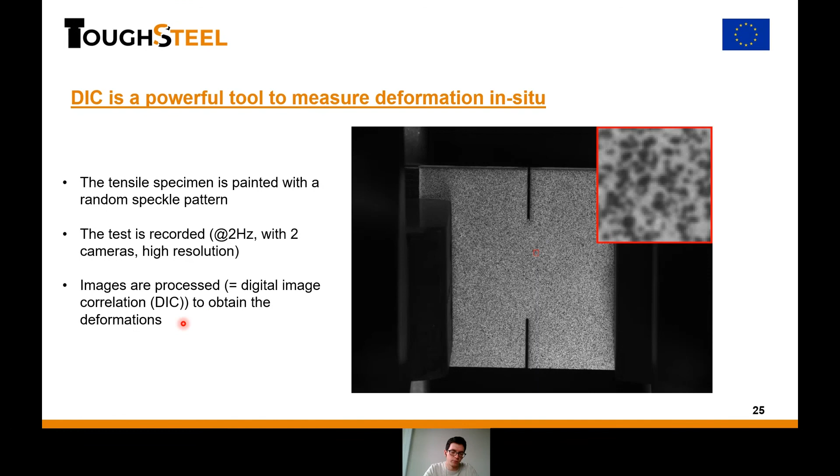After the test, you process all the images and compare each pixel between each image. That way, you can obtain the deformation through time.

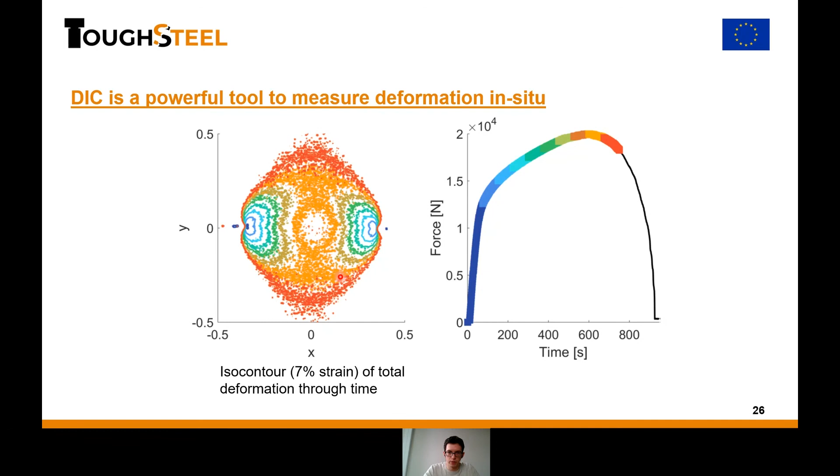Why I do this is to check if the criteria for the validity of the method were met for each of my tests. One of the criteria is that the ligament must be fully plastic before crack initiation. Since crack initiates at about the maximum force, a bit later, I can check here that the whole ligament was plastic right before crack initiation.

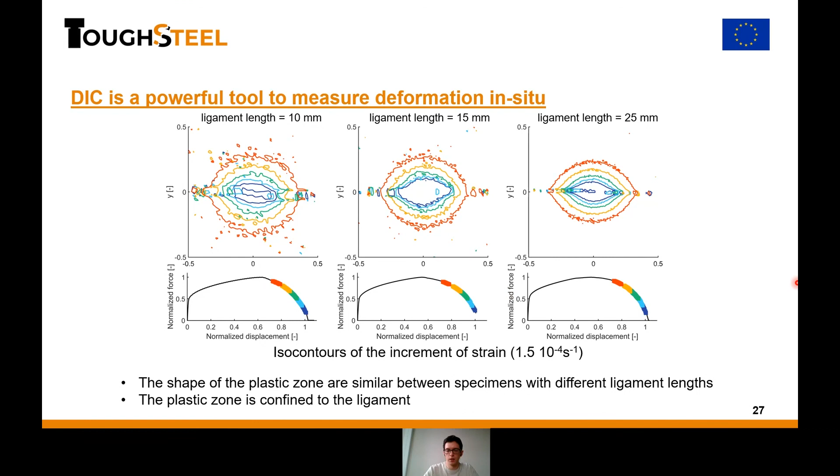And the second point, we can check that the plastic zone is confined to the ligaments during propagation as well. Okay, so this is everything I wanted to show you. So thank you for your attention.